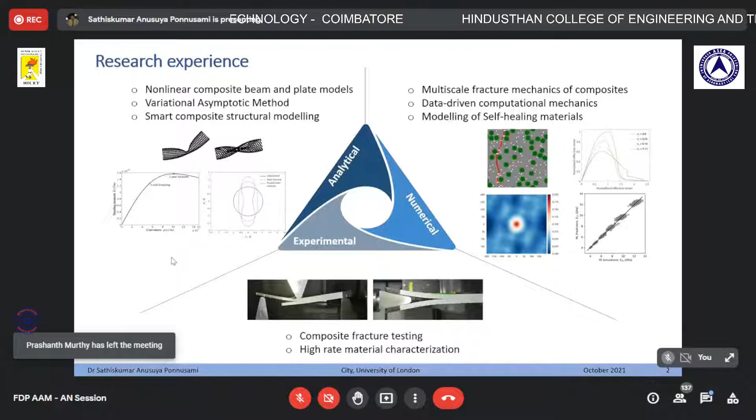So coming back to the topic, my research experience generally spans across three different areas: analytical methods for aerospace structures, computational techniques to analyze and design aerospace structures and materials, and also experimental investigations of advanced composites through experimental testing, especially under fracture and damage by impact loadings. I don't know why the date isn't changed—I changed it here, but it didn't change here. Please ignore that; this is also one of the presentations I gave earlier.

But let us go into the actual topic. Of course, you all very well know an airplane, and one of the core components of an airplane is the jet engine, isn't it?

As you can see schematically, the different components of a jet engine would start with the compressor, and then the usual components, including the combustion chamber, turbine, and the nozzle.

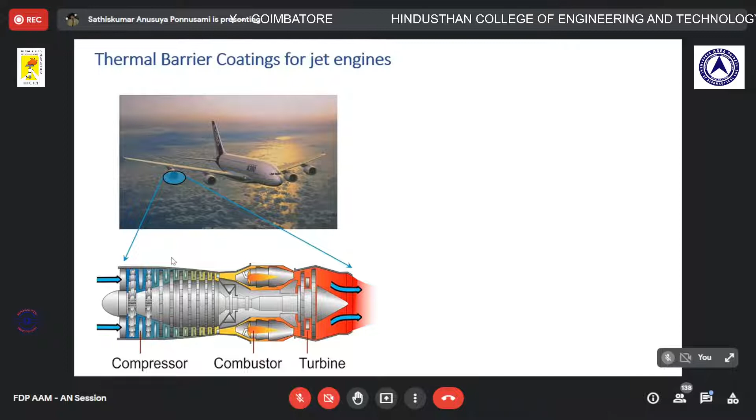So what we usually do is have these high-strength alloys, but on top of it, to withstand such very high temperatures, we basically coat these nickel blade alloys with ceramic coatings, and we call them thermal barrier coatings. As you can see here, this is your blade, a typical nickel alloy blade, and on top of it we have a coating, and the microstructural picture of the coating is what you see here.

As you can decipher from the top right image of the microstructure, you have different layers there. It's a single coating, but it's more of a hybrid coating. You have a blade underneath, that's the metallic blade, and on top of it you have the so-called bond coat, as you can see here if you can see my mouse pointer. The bond coat is a metallic layer again that is used to bond the underlying metallic blade to the ceramic coat on the top, and that ceramic coat is the top coat.

It can go up to... Okay, and why am I showing this picture is that this particular microstructure shows you a coating layer which is made of both metallic and ceramic constituents.

Imagine you have a metal and then a rubber layer bonded together, and you put it in the oven and heat it up. What happens? Because the two materials that are bonded together have different characteristics, one expanding more than the other, naturally what happens? You develop thermal stresses, isn't it? Because both of them are bonded together, but one of them tries to expand more than the other, so you naturally develop the so-called thermal stresses.

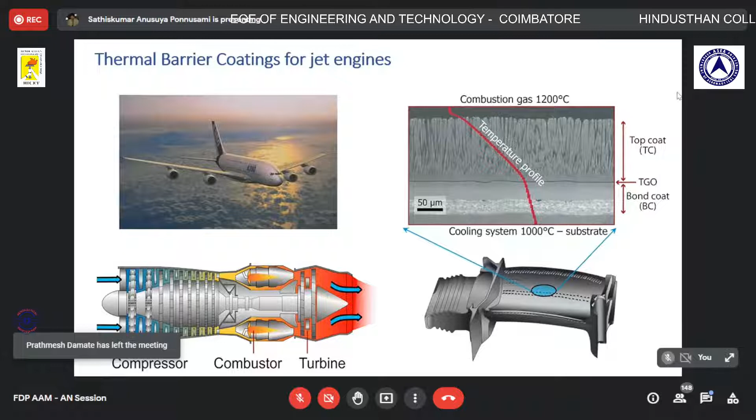And those thermal stresses during operation, meaning every takeoff and landing, those stresses create cracks, micro cracks. And that is what you would see in the next slide. So that is a schematic of the thermal barrier coating.

We call it TBC. And you see little micro cracks there, created due to the thermal stresses. During operation, you see a little black line in the middle. That little black line is basically called an oxide layer, which grows continuously during engine operation, meaning every takeoff and landing, the thickness of that particular black layer, the oxide layer, keeps growing.

But if it keeps growing, what happens? You are adding additional heterogeneity into the structure, which means the stresses would be more and more, which means the micro cracks would become more and more. But in the end, if you leave the micro cracks to form and grow, ultimately all these micro cracks coalesce and form a major crack, which leads to the entire failure of the coating. We call it spallation.

So the blade coatings... what the aeronautical industry do, mainly the MROs, whether it is the operators or the companies who make the engines, they replace the coatings. They take the engine out, clear the remaining bits and pieces of the coating, and then recoat it. And that process is extremely costly.

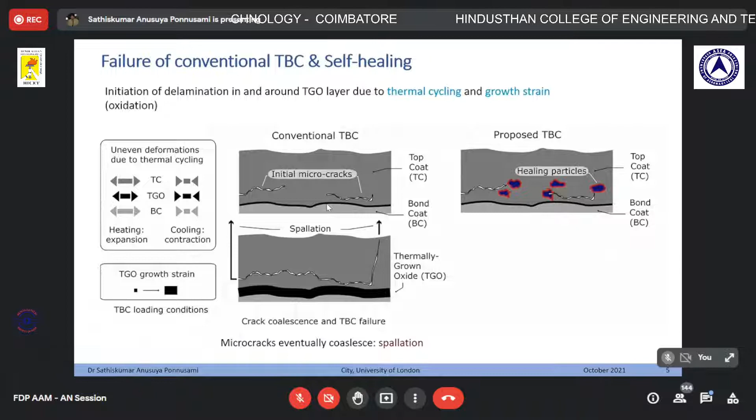These healing particles work when micro cracks happen, meaning when the flight is in operation and then when it lands, thermal stresses lead to cracks. When these cracks interact with the healing particles, the cracks open the particle, which contains a specific healing agent. That healing agent diffuses through the crack, and through further oxidation, it heals the crack, thereby regaining the structural integrity.

So what you are effectively doing is you see the blue-colored healed cracks. You are not allowing the micro cracks to coalesce, to join together to form a major crack, as you see on the left. The important point is you are not preventing any crack from forming, because that is unavoidable. Cracks do form, but we try to heal all those little micro cracks and prevent the formation of a major crack. By doing it, you basically enhance the lifetime.

Through our experimental testing with computational design, we were able to achieve a 30% increase in the lifetime of the thermal barrier coatings, and that is quite significant. 30% might seem a bit little, but it is quite significant for the aeronautical industry.

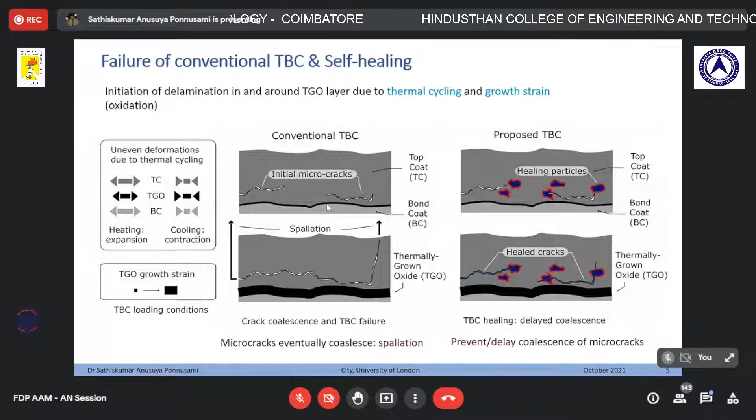Maintenance operations, or repair operations, are not only costly but also have downtime, engine downtime. You cannot fly without the engine, isn't it? So it all adds up to easily several hundreds of thousands of pounds or euros, depending on where you are, for each carrier. And if you add that to the entire world, you can calculate the amount of cost and time, human time, and downtime as well, for the aeronautical industry. So this structure or material is clearly multifunctional.

More than that, it heals itself. When the structure or material cracks, it heals itself and regains its original load carrying capability. That is the additional functionality that we add into this particular system, which is not there before, without adding more weight.

Natural questions would arise. Some of them would be: you are adding foreign particles into this existing structure, wouldn't it weaken the system? A natural question, because these particles look like foreign objects for this original system. Wouldn't it affect the original structural integrity? Yes, the answer is yes, it could be. But that is why we need to do the research, to see how effective it is and what cost effectiveness we achieve through this.

The other obvious question is: we have these nice healing particles, but when the crack forms, what if the crack goes away from the particle instead of being attracted towards it? That is also a beautiful difficulty, isn't it? Imagine the crack goes away from the particle instead of hitting the healing particle. Then the entire concept is a failure, isn't it?

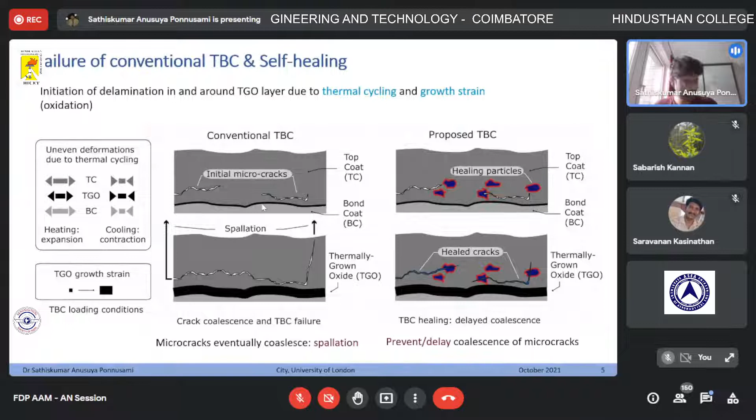So that is the whole crux of this particular concept. Of course, I do not want to dwell into the details of the research, but let me take you through some of the research results.

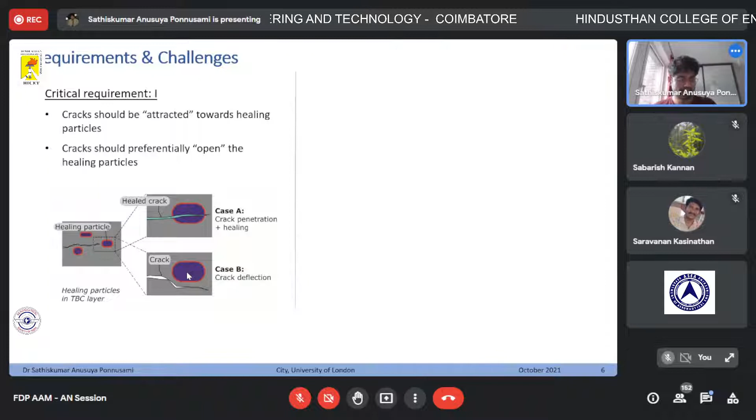As I talked about, the first challenge is, if you see case A and case B, you clearly see case A is what we need for the healing to work. Whereas case B is something we do not want, because the crack deflects, and in that case healing would not happen. But the interesting point here is, in traditional composites, traditional fiber composites or particulate composites that we typically use in aerospace, automotive, and wind energy industry, wind turbine blades, we actually would like to see case B happen. And why is that?

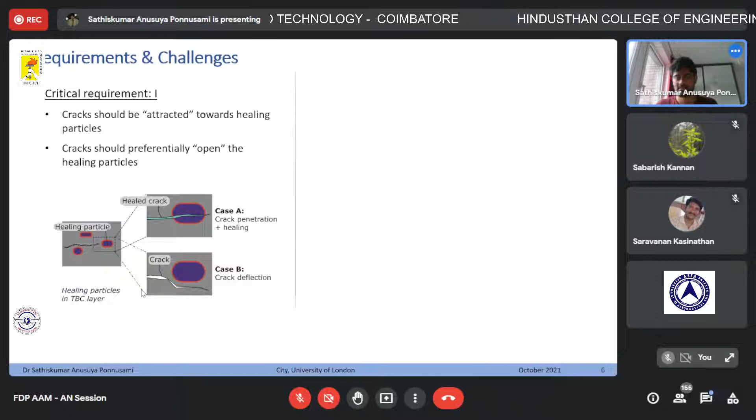I'm not sure if this session can be interactive, but in the context of composites, why is that so? Because crack deflection is one of the strengthening mechanisms, one of the toughening mechanisms for composite materials.

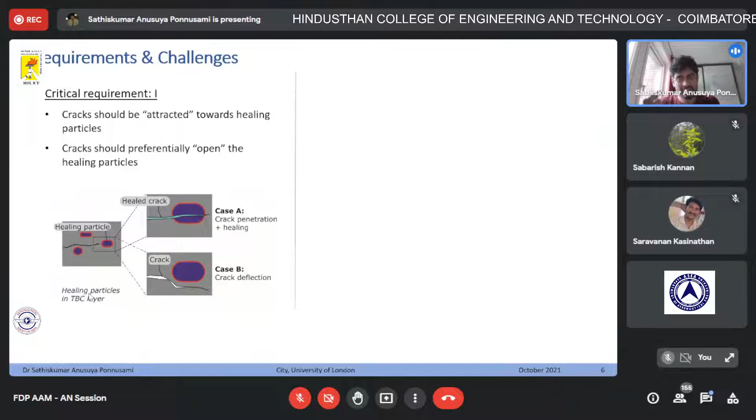But in this particular application, we do not want it. We do not want strengthening or toughening. We want the particles, the healing particles, to break. Because remember, the purpose of the healing particle is not to strengthen or toughen the original structure or material, but rather to introduce the healing functionality.

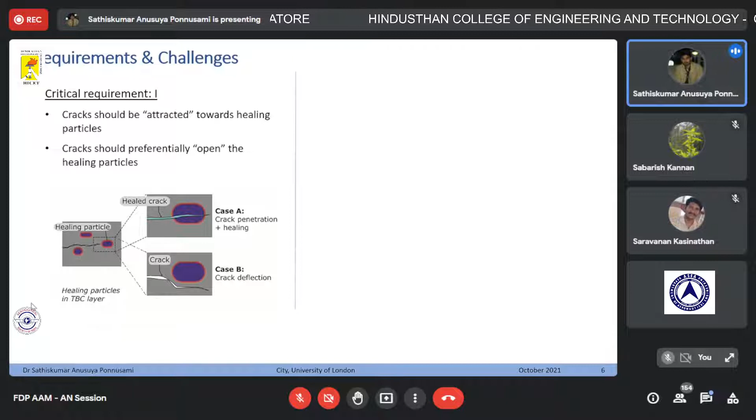So we make sure that case A happens, through a series of parametric studies, both experimental and numerical, to choose the right type of particle in terms of its properties.

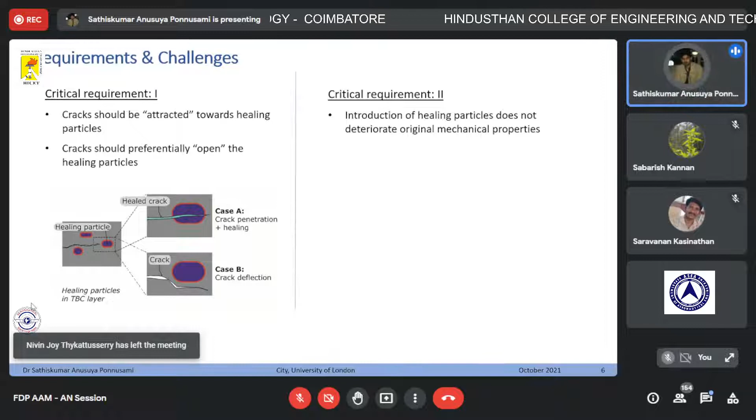The second requirement, as I already discussed, is that the introduction of healing particles should not deteriorate the original mechanical properties. It's an obvious requirement, because you introduce something new, and what if you lose the already existing properties? That's not advantageous. So that is another challenge.

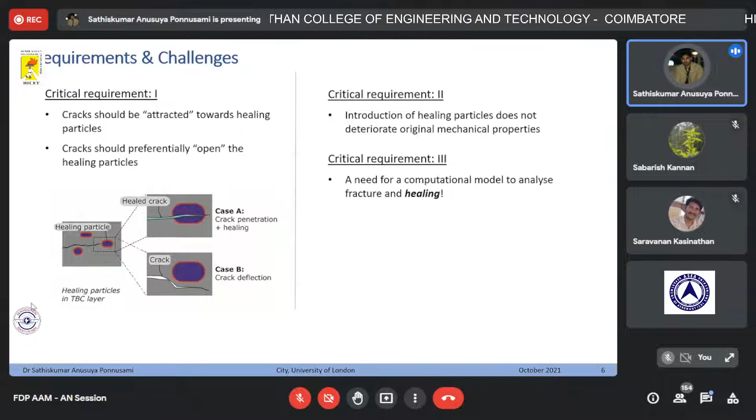And the third challenge is that once this particular proposal or idea is developed and matured, we need a computational model or tool to analyze these kinds of systems. Because as you all know, we have a range of tools to analyze fracture or damage in structures, but we do not have tools to analyze healing.

Healing is the reverse of damage, isn't it? Reverse of fracture. And for that, the physical models are not that much available, either in open source or commercial tools. So the research also encompasses developing computational tools to analyze these new mechanisms.

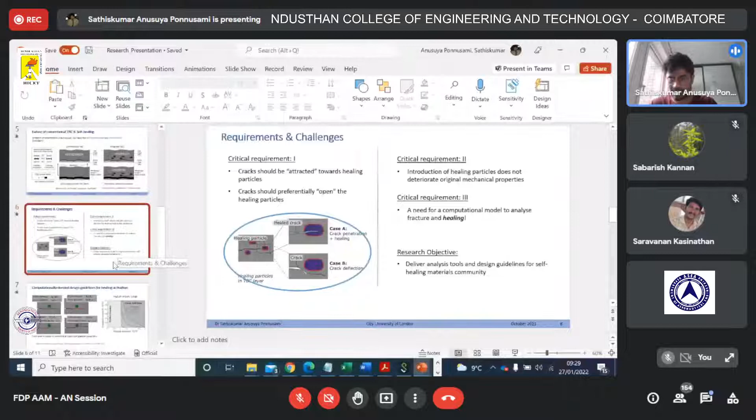Okay, so that is the part on multifunctional materials. For the first part, let me quickly move on without going into the details of the results, because I want to cover a few more topics. The second part of the multifunctional materials or composites is what I'm going to show in this particular animation.

During 2015-16, we participated in the Airbus competition, the Fly Your Ideas competition, and the concept actually won first prize. Of course, it's not only hard work but also luck, isn't it? We had more than 500 teams participating from more than 100 countries, and had to go through 3 different rounds before finally winning first place.

It's not just hard work, though hard work is of course needed. It's also about how you present things, how you communicate things. It all matters. It's not just the idea alone, but also how you package things. One part is doing excellent research, the other is how you disseminate that research, not only to the technical audience but also to the general audience. Both are equally important.

That is also the case in teaching. It's not about how good you are in technical knowledge, but also how good you communicate, isn't it? Research and teaching don't necessarily have to be the same. One person can be really good at research, and another can be really good at teaching. It's a unique skill we all need to develop as academics, to blend these two different skills together, so students can benefit.

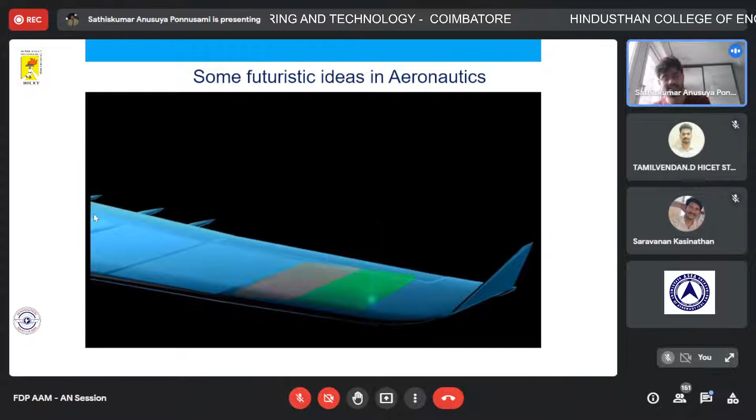In the end, when the wing vibrates, you harvest or recycle electrical energy from the vibrations and store it in the adjacent battery panel. So simultaneously, you're trying to achieve an aircraft wing that originally handled the loads but now also recycles and stores energy. So your aircraft wing is doing three different jobs, three different functions, and that is a true multifunctional structure.

Of course, if I wanted to give a presentation on just this project, that would take easily a couple of hours. But without getting into the details, what we tried to achieve is the design of a multifunctional wing and fuselage such that this structure does three different functions: load bearing, meaning the strength and stiffness of the existing structure is not compromised.

Then we made sure it harvests or recycles the maximum possible electrical energy from the vibrations. And the third one, we made sure it stores sufficient recycled energy into its structure. Thereby your structure is a battery as well — it's a harvester and a load bearer. And that is the beauty.

Why is this important? This concept is important especially for sustainable aviation, the future of aviation. All of you would know about Tesla, but all the companies are now making electric automotive cars, for obvious reasons, to enable greener and sustainable transportation, to reduce CO2 emissions so that climate change can be mitigated. That is the whole purpose.

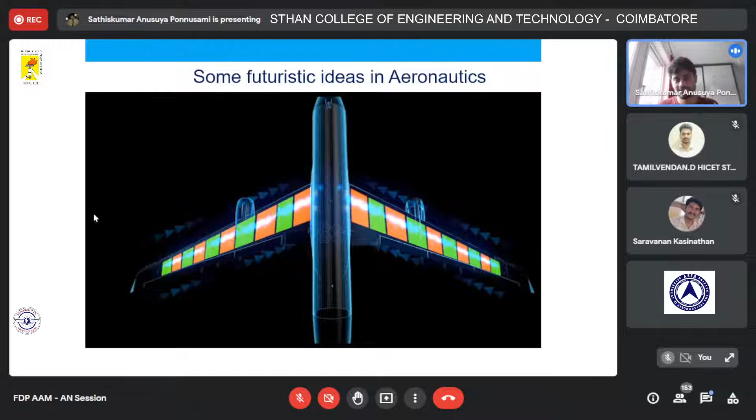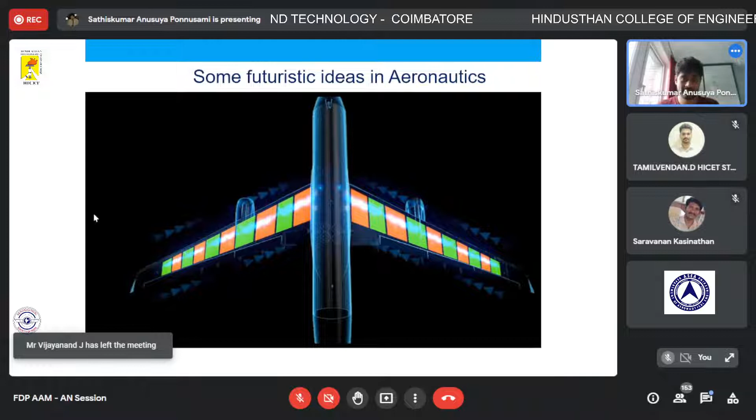So the only way possible is to have more battery capacity without adding weight and space. This particular concept would be the ideal solution, because now, if designed properly, you're converting your existing wing and fuselage structure into a battery, without adding weight and space. Wings and fuselage are anyway there, present - you can't fly without the fuselage and the wing, isn't it? So you're doubling, or rather tripling up the existing structure to carry more energy without adding weight and space.

That means you can possibly increase the range and endurance by 50%. We showed in this project that we could enhance or increase the range of electric planes by 50%, and that is quite significant. In other words, an airplane developed by Airbus that flies 1,000 miles or kilometers, with this concept, could go 1,500 miles or kilometers in one stretch. That is the advantage we're talking about, and it can only be driven by such futuristic ideas, one of which is multifunctional composites.

So as a conclusion of this first part of the talk, multifunctional composites do hold the key for future design of airplanes, and also helicopters and drones as well. Drones have a similar issue, especially electric drones - you have to recharge them, isn't it?

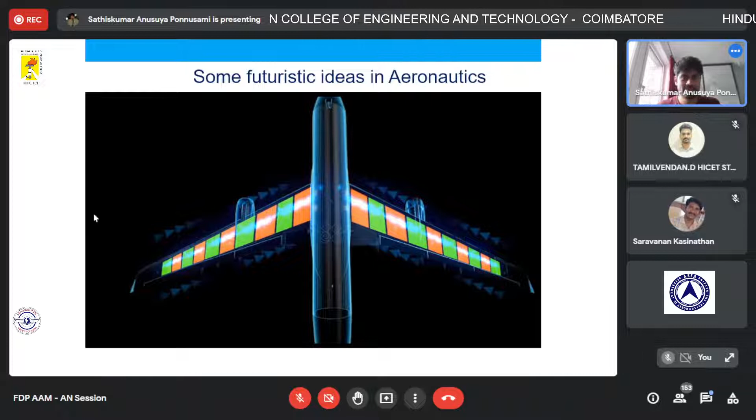Drones find many applications these days, including taking videos for wedding ceremonies, but many other uses too - surveillance, for example military surveillance, and much more than that, during floods, natural calamities, and so on. For all this, the difficulty is that you need to recharge them. But with these concepts, it's really easy to enhance the range and endurance of drones quite easily.

So the take-home message is that these concepts definitely hold the key for next generation design of airplanes. With that, I'll give 5 minutes - not really a break, but if you want to discuss anything, feel free to do that. I also take this opportunity to tell a couple of things.

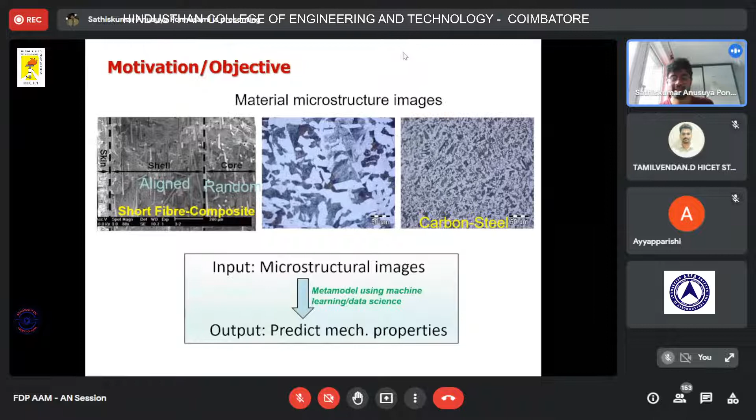Can we use machine learning or artificial intelligence to replace the testing, by just looking at the images of the material? Almost any lab has an optical microscope, if not a scanning electron microscope. You look into it, you take an image, you feed it to your AI algorithm, and then the AI can give the properties. That is the fundamental explorative idea of this particular research. The answer in short, yes, it is possible.

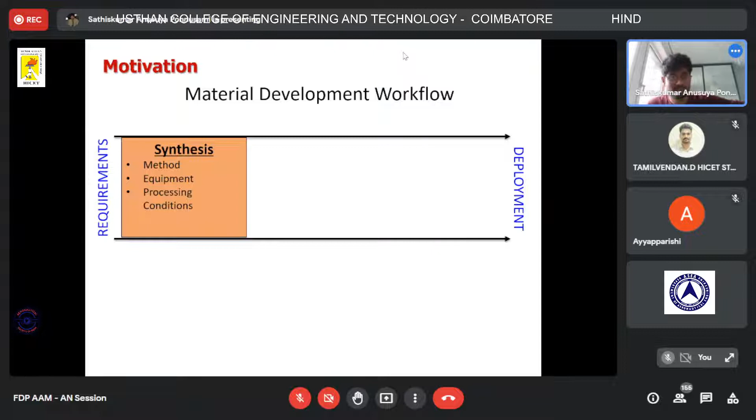What is the primary motive for this objective of getting properties directly from microstructural images? If you look at any typical material development workflow, it starts with the requirements, the end requirements of the structure with which the material is going to be made. So it starts with the synthesis. You choose the method of synthesis, the equipment that are needed, the processing conditions in terms of pressure, temperature, environmental conditions, and so on.

If you see that the property is not enough, if it doesn't satisfy the requirements, you go back to the process and repeat the cycle. You change your manufacturing method or your equipment, your processing condition, and then you arrive at a certain resulting material. You have the microstructure and you test it to see if you achieve the required properties. That is a time-consuming, iterative process.

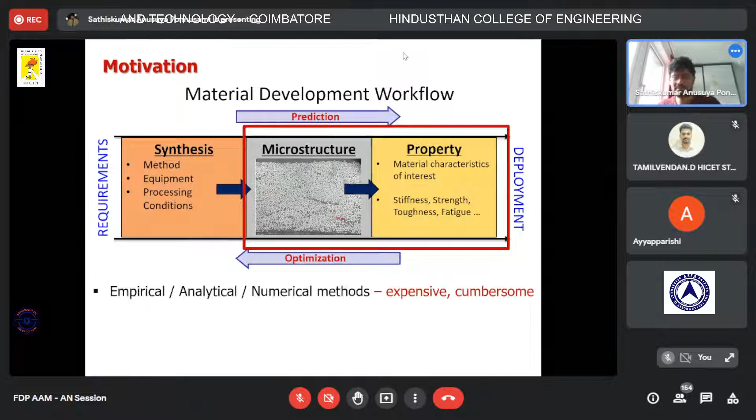That is why, as part of the optimization of material development, what we do is replace experiments typically using numerical methods, computational finite element analysis, to get the properties from the microstructure, which we call multi-scale homogenization. I'm sure many of you are aware of that term, but that is expensive. For doing this optimization process in order to accelerate material development, we need a reduced order strategy, and that is where data-driven machine learning technique comes in. That is the core part of this project.

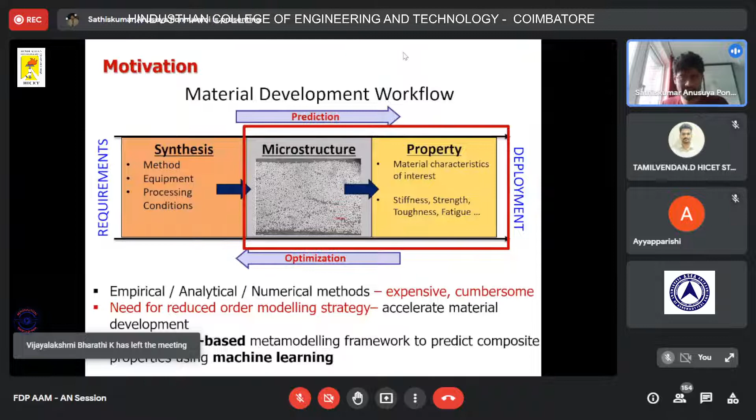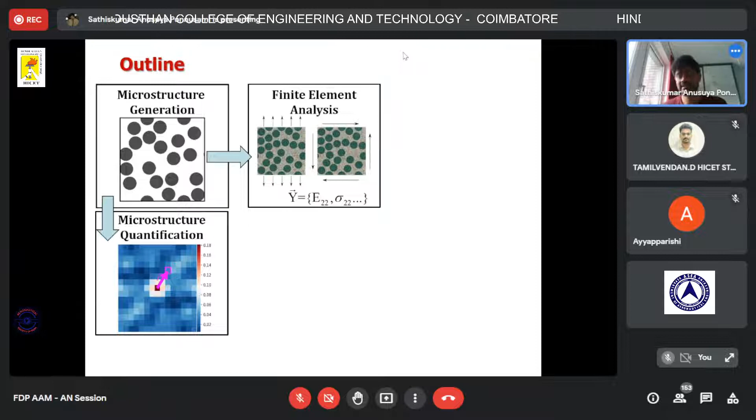The outline is here: we generate thousands of microstructures of composite materials, then we conduct finite element analysis using an automated batch to get all the properties of our interest. Once we have the properties and the images, we have the dataset ready. With this dataset, we train a machine learning algorithm to predict the properties by purely, or solely, looking at the microstructural images.

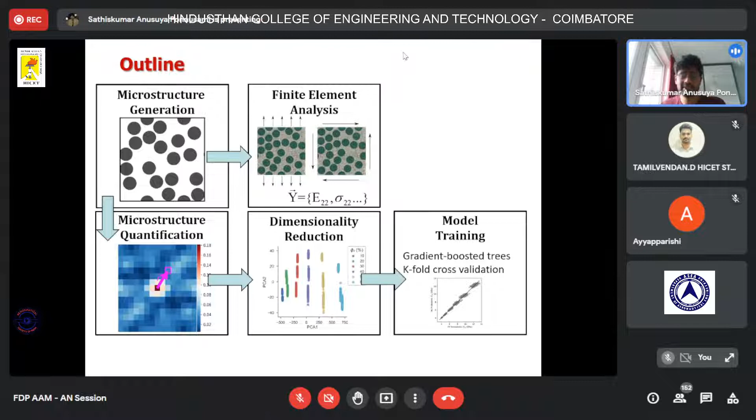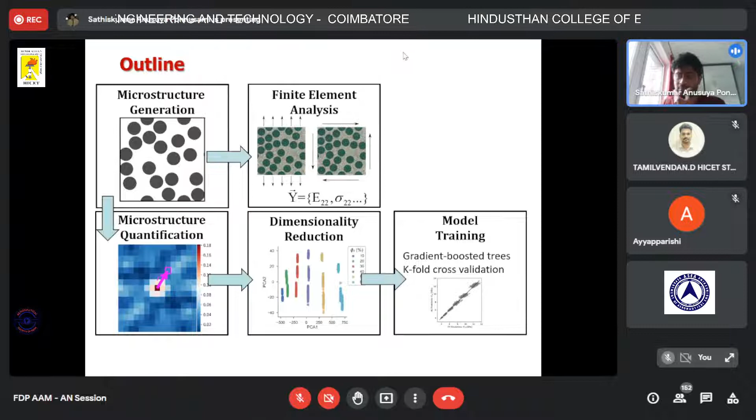But there are some intermediate steps. The first step is we quantify the microstructure, then we do some dimensionality reduction, which I'll talk a bit about in the presentation. Then we use the dimensionally reduced microstructural descriptors for training the machine learning model. In this research, we used a technique called gradient boosted tree regressor, one of the classical machine learning algorithms used in different applications. Then you validate the model, thereby completing the loop. Once you finish this, you have a machine learning model that gives you the properties by just looking at the microstructural image, and that is it.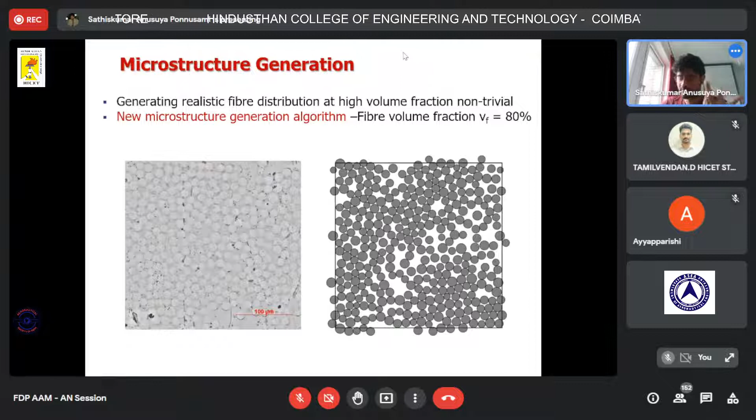Going in detail about the microstructure generation, or each step in this process: on the left you have an actual microstructure of a composite, on the right you have the microstructure we generated using our own code. Because to develop this tool, you cannot manufacture all the materials, isn't it? You need to manufacture 1,000 different microstructures, you cannot really manufacture it. That defeats the purpose.

So what we do is take a virtual approach in which we generate the microstructure synthetically using computers, but we make sure we mimic all the relevant microstructural features from the actual material. From these two pictures, you may not realize that the right is very similar to the left. For that, you need to do a couple of analyses, shown in these two pictures. Without spending too much time on this, you see two different parameters which characterize the microstructure. One is the first neighbor distance, meaning if you take one fiber, where the next fiber is located - that is one of the microstructural descriptors. The second is the orientation of the nearest fiber. We do this analysis for both the real microstructure and our own synthetically generated microstructure.

You see the red line is the experimental one, and the black line, the black nice varying line here is the current one, the algorithm that we generated. They match reasonably well, both the left and the right, which means you actually capture the experimental or the real features of the material, and that is good enough to start with.

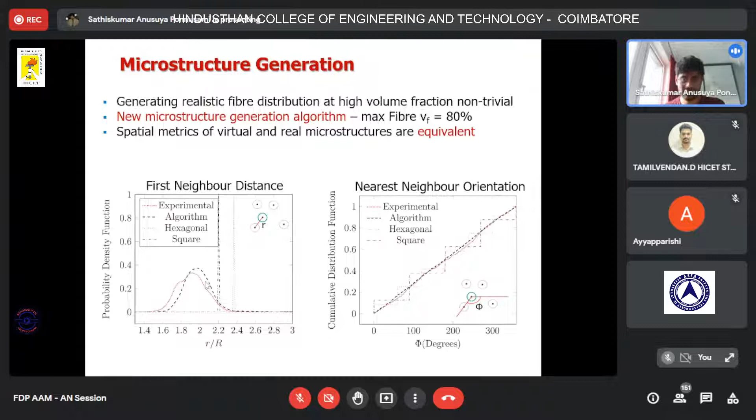So once you have a validated algorithm that is able to produce nice realistic images, you move on to the next step. We can generate any microstructure of any shape, any size, any volume fraction, as you can see in this particular slide. Not only in 2D, but also all 3D microstructures in which you only see the particles, of any size or shape, volume fraction.

It can also be fibers. You do not see the matrix because then the particles would be invisible if I show the matrix here. But what you can see is that you see RVEs, which are 3D. RVE meaning representative volume element.

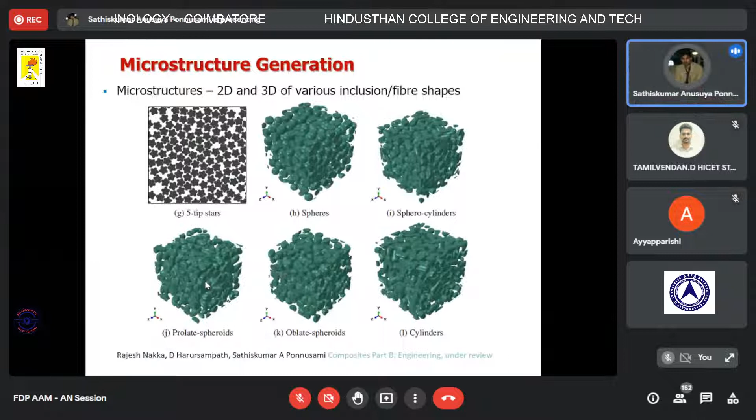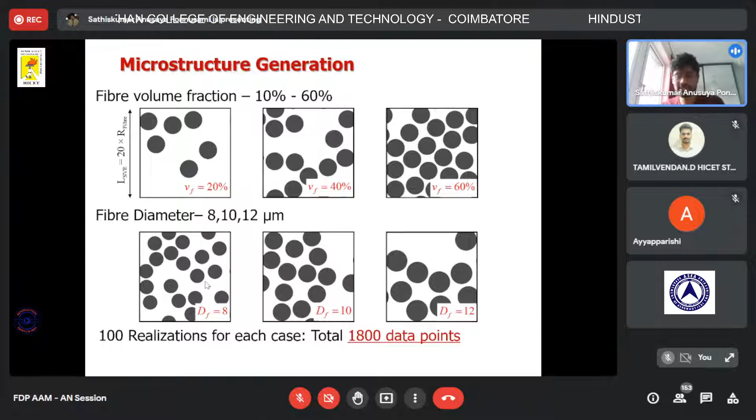So with this, we proceed to collect thousands of microstructures. We conduct finite element analysis and get the properties. Some of the samples are what you see, the capability of the microstructure generation, and these are some data points here. For the first study, we took 1,800 data points, but for now we have more than 10 to 15,000, around 15,000 microstructures together with the properties.

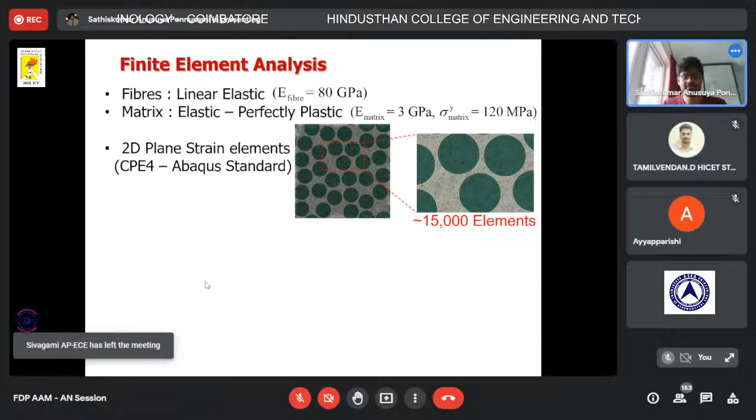All these microstructural images we feed to finite element analysis, which is an automated framework that we have. We have certain assumptions on the material properties. Obviously fibers are linear elastic, we assume, and we take the properties of a glass fiber for now. The matrix we assume to be elastic perfectly plastic, and we do 2D analysis for this particular research, but of course we extend this for 3D as well in the current work being done.

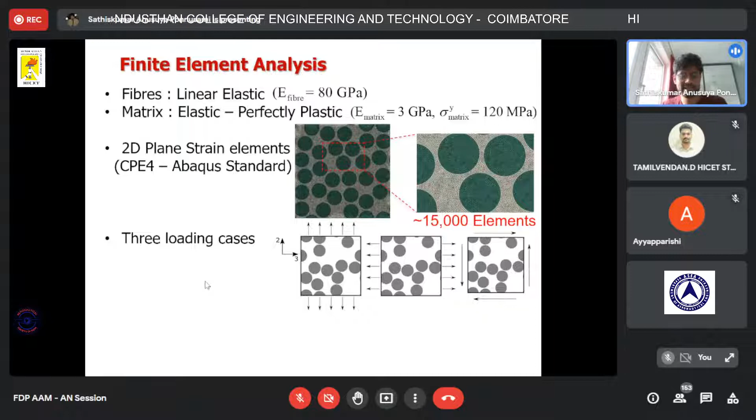Then we look at different loading cases possible: tension, compression, and also shear in different directions. We extract the properties, that is Young's modulus in 2 directions and 3 directions, shear modulus, yield strength in 2 directions, and yield strength in 3 directions. For this pilot exercise, we consider these 5 properties as the properties of the material: Young's modulus, shear modulus, and yield strength. So those are the outputs you seek, and the input is the microstructural image.

So now what you have is the data set. If I say data set, it basically means the input-output combination. In this problem, the input are the thousands of microstructural images, the output is all these properties. Now what do we do with this? We choose and design a machine learning model that can be trained on this data set, meaning it should learn how the microstructural features are influencing the properties. That is the purpose of a machine learning model, to learn these correlations between the features and the properties.

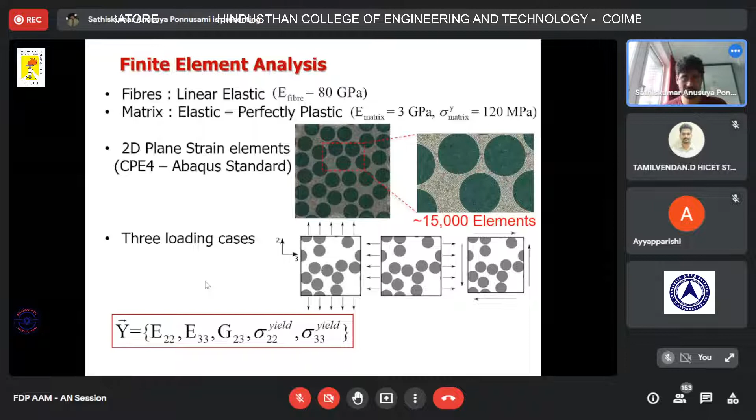Before that, there are 2 different machine learning tools that we developed. One is based on classical machine learning, which works on a data set that has to do with numbers, meaning the inputs have to be numbers and the outputs have to be numbers. It doesn't work with images. So for that we do a little pre-processing, you can call it data processing or image processing, in which we use the so-called two-point correlation function.

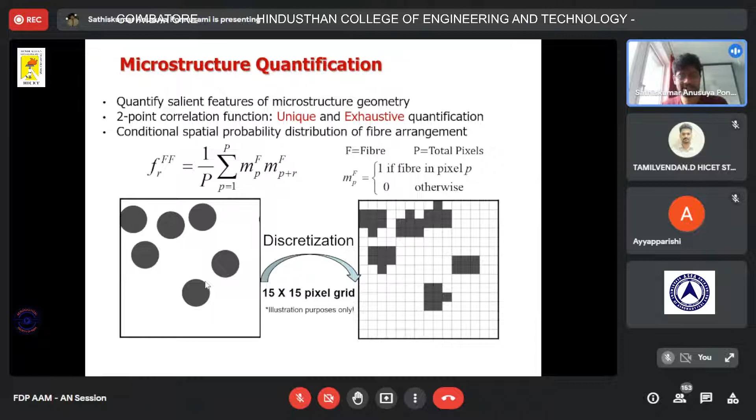You take a microstructure and discretize it, and then you calculate the two-point correlation function, which is essentially characterizing the microstructure. Once you discretize it, you take a little vector of size r of different sizes from one point to the other, in which you change the magnitude as well as orientation, and then you characterize the microstructure. In the end you get a pixelated image that you see on the right, which is basically a set of numbers, a spatially located matrix, and the highest value is actually the volume fraction of the particles. If I go to the next slide it will be even clearer.

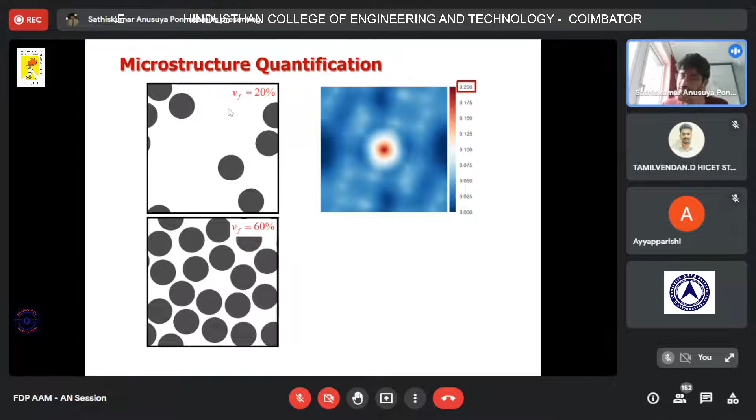So this is the microstructure on the left. The right is the two-point correlation function plotted. The peak value is 0.2, that is nothing but 20%, and 20% is basically the volume fraction you see on the left. And another example, which is for higher volume fraction, that is 60%.

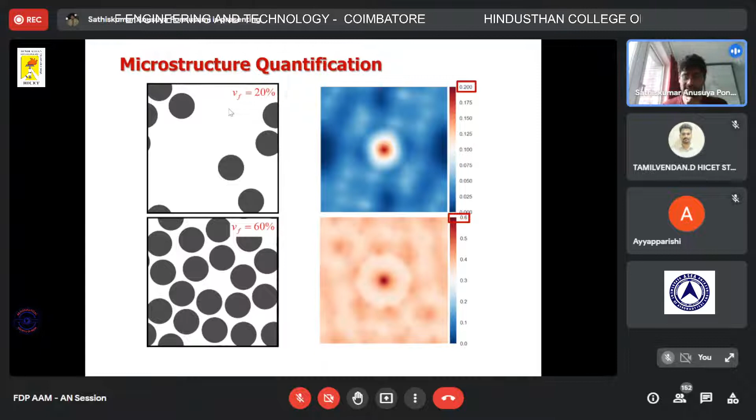The two-point correlation function is basically what you see on the bottom right. Again, the peak value is the volume fraction, that is 60%. But what is important to remember here is that this two-point correlation function basically represents your microstructure.

And why are we doing it? Because the machine learning algorithm cannot read the image directly. The machine learning algorithm we currently choose works with numbers, it's a regression algorithm. So these two right images are a bunch of numbers expressed in a matrix form, and that is quite confusing for the machine learning model, isn't it?

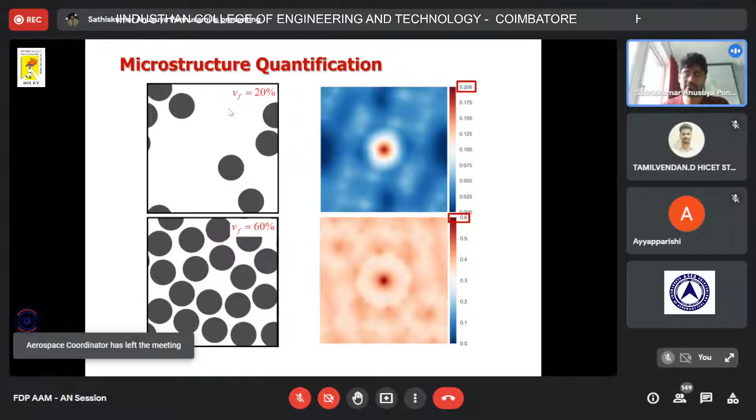So for that, we do one more step, called dimensionality reduction, using principal component analysis. To give a quick understanding, you might have studied eigenvalue problems. If you have a matrix of size 10 by 10, fully populated, you can convert it to a different coordinate system whereby your matrix would be a pure diagonal matrix with eigenvalues on the diagonal and the rest of the off-diagonal elements being 0. They still represent the original system, isn't it? So it's the same thing.

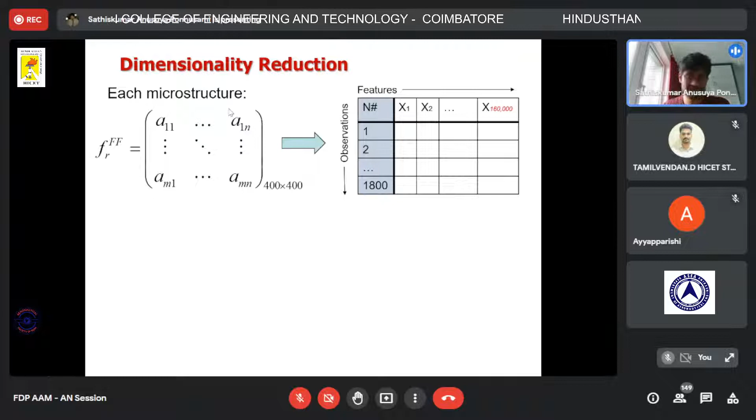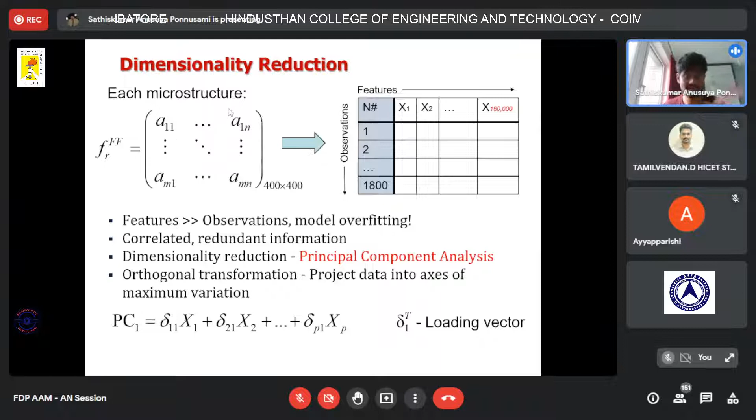So here, instead of having a matrix of size 400 by 400, meaning we divide each image into 400 by 400 pixels, which means the size of the image would be 160,000, that is your number of input variables for the machine learning model, which is quite complicated for one image. So we use dimensionality reduction via principal component analysis, and we obtain a set of reduced numbers that represent the actual image. That is what principal component analysis is.

For example, the first principal component tracks the fiber volume fraction. The second might track the fiber diameter. The third might track the fiber distribution, or the spacing between the fibers, and so on. And if you go to higher and higher order, the meaning may not be obvious, but it still characterizes some of the microstructural features.

It's similar to vibration analysis. The first fundamental frequency is the dominant one, isn't it? Then you have many modes: bending modes, torsional modes, extensional modes, and so on. But for a beam or a plate, ideally or theoretically you have an infinite number of degrees of freedom, meaning infinite fundamental natural frequencies. But you do not take them all for your design, isn't it? You may take up to the first 10 frequencies. But if you want to know the meaning of the 20th or 30th frequency, it may not be as obvious, but it still has some of the details of your structure.

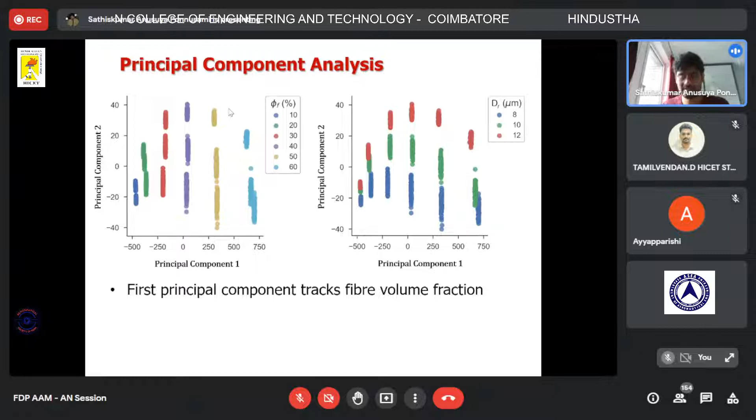Same thing applies here. The first frequencies would be more dominant in defining the microstructure, but the later principal components may not be as important. But we still take the first 200 principal components for the machine learning training.

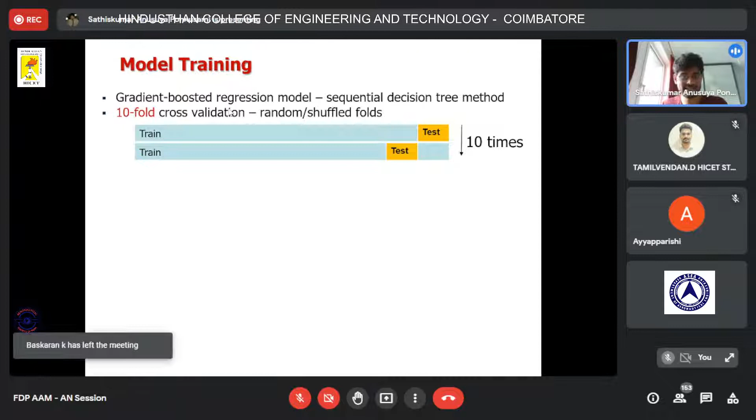And then we go to the actual machine learning model, which is a gradient boosted regression model. We use so-called tenfold cross-validation, which is a way to generalize your model and test its accuracy in terms of generalizing it. And after a set of hyperparameter tuning, meaning optimizing your machine learning model for better learning, you have the results here. Once your model is trained, you have the results, as you can see at the bottom.

What you have to understand here is that the x-axis is the actual values of the property derived from finite element simulation, or it can come from experiments. On the y-axis, you have the predictions from the machine learning model. If the accuracy is 100%, all the predictions should lie along the 45-degree line. As you can see, all of them are aligned very close to the 45-degree line, which means the accuracy is quite impressive.

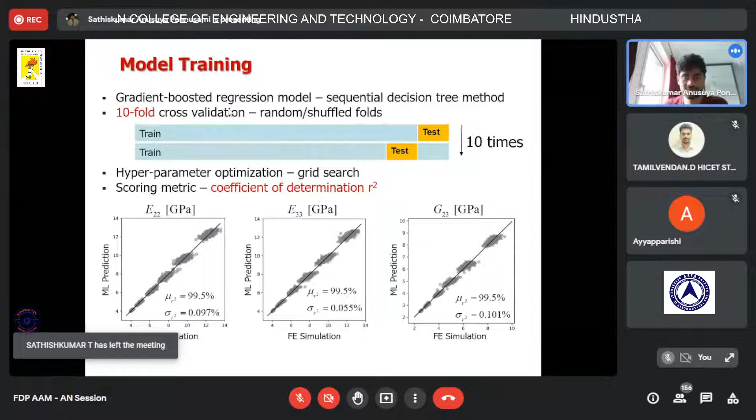This is for these elastic properties, the Young's modulus and the shear modulus. Of course, we have the yield strength as well, which is quite nonlinear, isn't it? Yield strength has to do with failure. You can see even there, though the property is nonlinear, meaning the correlation is nonlinear, the machine learning model is able to capture the properties really well.

So we got excellent predictions. The accuracy is not 100%, but that is not the purpose, isn't it? Even if we get 90 to 95% accuracy, that is really good enough. But the main takeaway here is the computational effort.

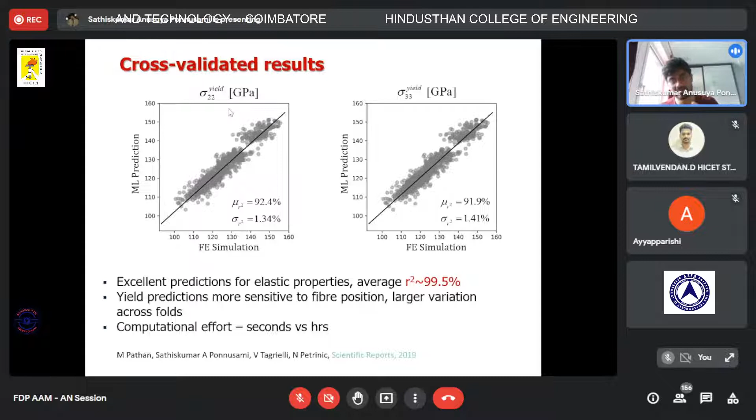To get all these properties, we need to conduct finite element analysis, nonlinear, in a multi-scale framework, that would take a couple of hours easily. And if you want to do experiments, I don't have to tell you - you need to manufacture the material, test it, and get the properties. So we are talking about seconds if you use a machine learning model, in which you just feed them an image, and the model gives the properties.

This research has been published in Nature Scientific Reports a couple of years back, and for obvious reasons, this was rated as top 100 throughout the materials engineering domain for that particular year, 2019-20.

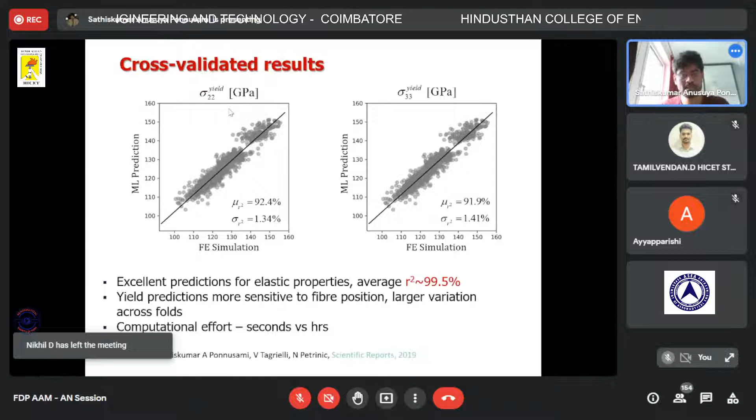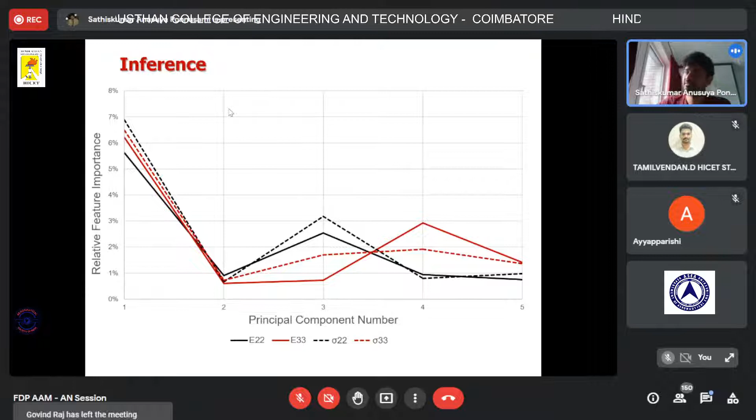The other thing which is really important is, of course, you can train and develop a machine learning model on anything, literally, isn't it? That's quite easy, because you have several open source literature and codes available - you can always do it. But as an engineer, as a researcher, as an academic, what you really need to know, what you need to be aware of, is what additional contribution you make to the scientific community - that is what is important.

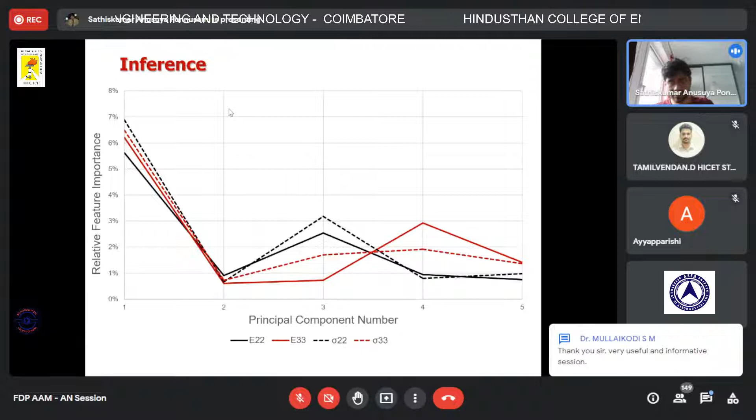So one of them is basically this inference, what you get out of it. Here, what we do is we not only train the models and predict the properties, which is of course useful, but we also understand how the machine learning model works. What is it really doing? How is it learning? How is it correlating between the microstructural features and the properties?

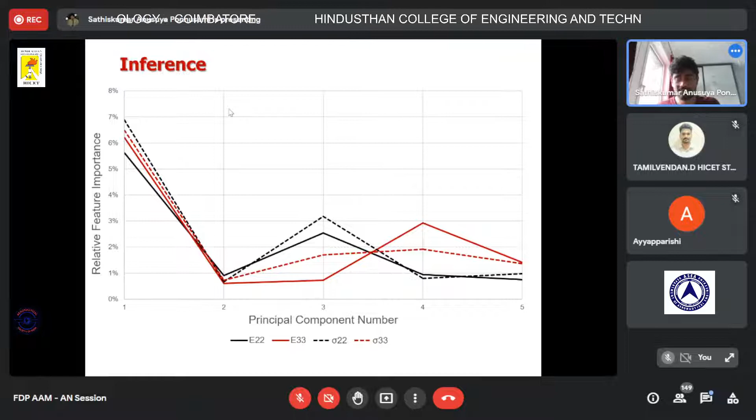So that is this little study in which you see the different principal components and how they are influencing the predictions of the machine learning model. As you can obviously see, the first principal component is the major contributor to the predictions, but further principal components do contribute too. Interestingly, the first principal component is actually the volume fraction, which definitely dominates the predictions, no doubt about it.

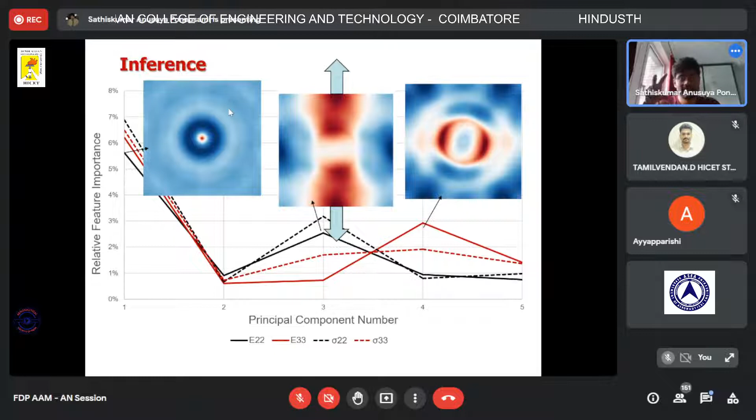That's the first order effect - how many fibers do you have in the composite. But then you see the third and the fourth principal component somehow tries to understand how the fibers are oriented. I've plotted the third and the fourth principal component, and they peak - not the maximum peak, but they have their own local peaks. So they have influence, telling the machine learning algorithm, or in other words, the machine learning algorithm learns how the fibers are oriented.

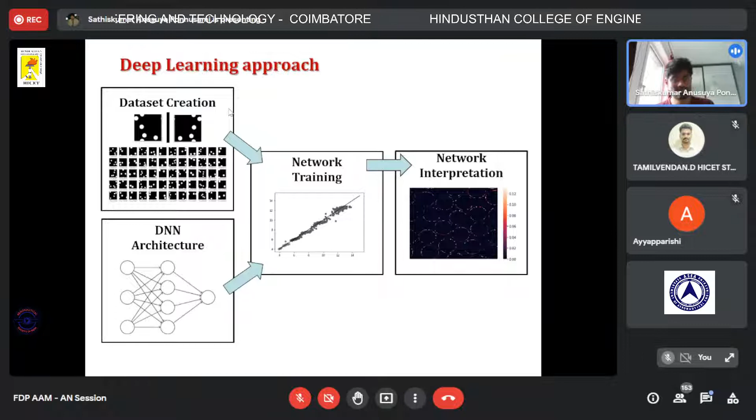Now the second research that is currently under review - instead of using a classical machine learning algorithm, we want to eliminate the need for the pre-processing of the image. What we need to do is provide the image directly as input. I'll finish in a couple of minutes.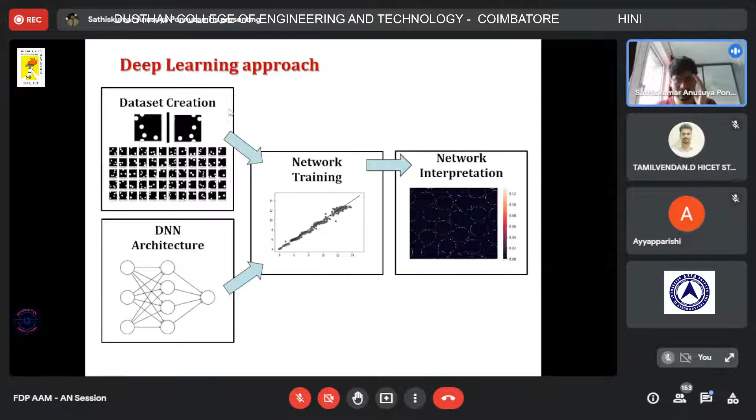We want to directly feed the image into the network, into the deep learning tool, and then get the properties directly as outputs. That is what we did here, in which we don't have to do the 2-point correlation function or the principal component analysis. Your deep learning tool or algorithm directly takes in images and spits out the properties.

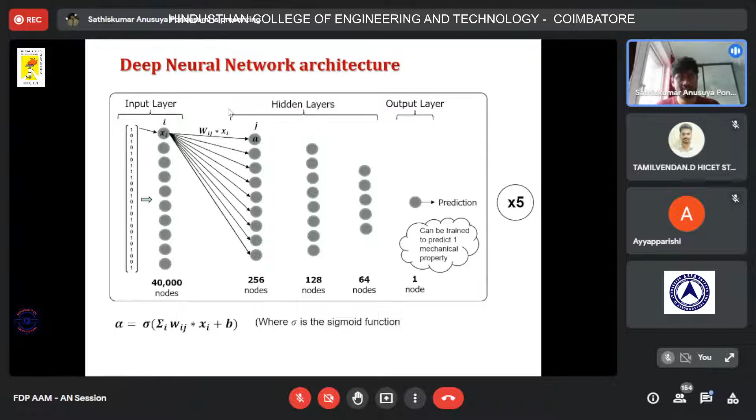Without going into detail, it's basically the fully connected neural network that we used, but we also used a convolutional neural network too. And here are the predictions.

Neural networks are shown to be predicting better than the machine learning algorithm that we developed earlier, because the accuracy was about 98 to 99%, both for the elastic properties, but also in the next slide you will see the CNN, the bottom picture, the bottom result obtained from the convolutional neural network.

They predict really well the properties. The accuracy is easily close to 99%. Whereas the top model, that is the fully connected network, the accuracy is not as good because it's a fully connected network, meaning the learning is not as effective as the convolutional neural network.

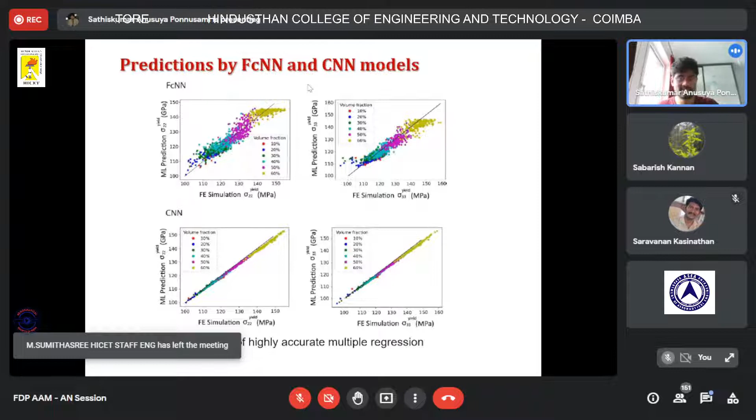Especially for the nonlinear property, which is the yield strength. So I'll spend a minute or two on this particular one, which is interpretability.

Why is this important? Because, as I said before, anyone can develop a machine learning model if you have nice data. What is really important as an academic, as a researcher, is that you need to understand what is really going on in the black box, because any AI, machine learning, deep learning is always considered to be a black box, isn't it?

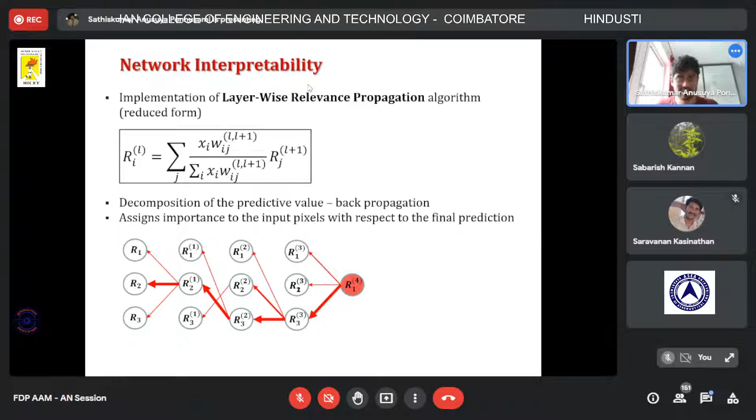Because effectively a machine learning model is an intelligent curve fit. It's an intelligent interpolation function, but in a multidimensional space, which is not that trivial if you use any other classical interpolation or curve fit technique.

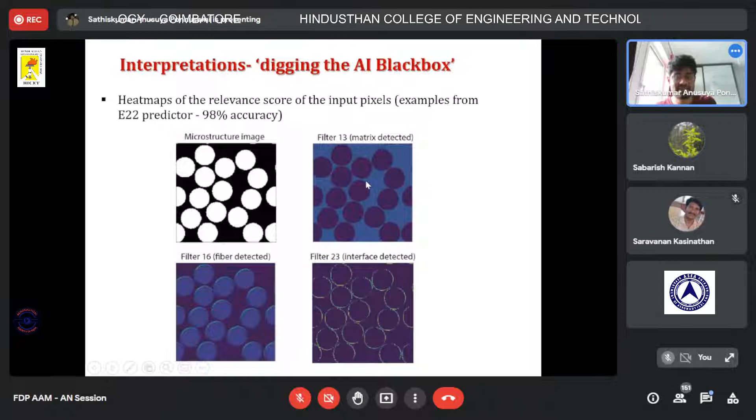So the machine learning model, or here the deep learning model, a subset of machine learning, is able to extract the important features. For example, the top left is the actual image. The top right is where the machine learning model itself detects the matrix phase. The bottom left detects the fiber phase. The bottom right detects the interface.

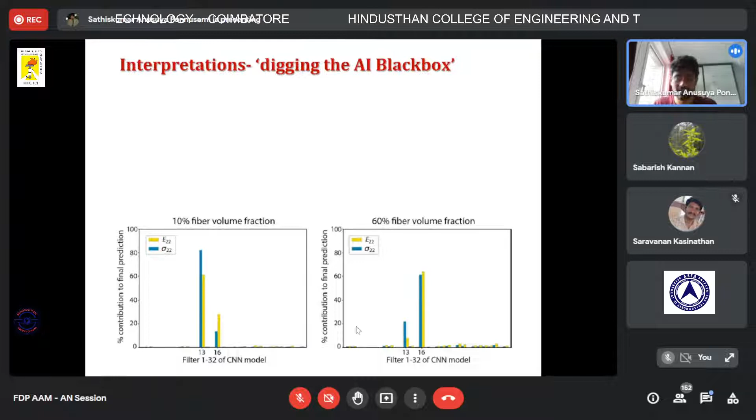We managed to get nice physics out of it, meaning we derived physics from the unphysical AI black box, and that is quite impressive, which is not usually done. We actually managed to derive physical models for predicting the properties from AI, and that is what you see here. This little work is under review currently.

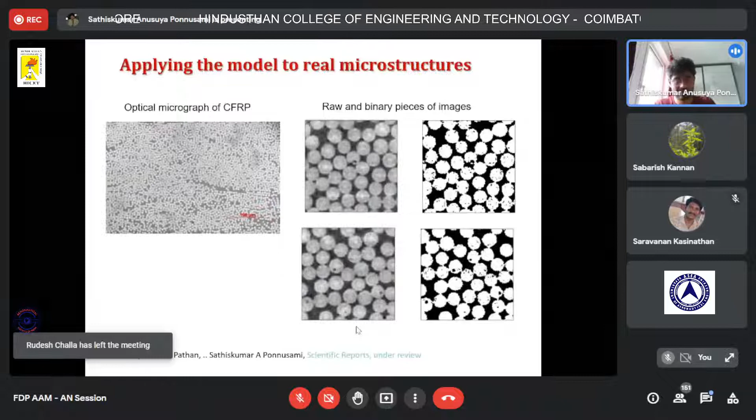We also showcase the applicability of this tool that we developed for real images. So far we did virtual testing, but now what you see is the actual micrograph, real material. We took different chunks of these materials, fed the real images into the model that we developed, and as you can see, the prediction is really good because the accuracy is easily 95%.

In other words, one of the properties, Young's modulus, the experimental non-dimensionalized value is 3.63, whereas the predicted value is 3.87 to 3.89, which is quite impressive because the clarity of the experimental image is really bad. But even then, your AI tool is able to learn and predict the properties reasonably well, and that is a success really.

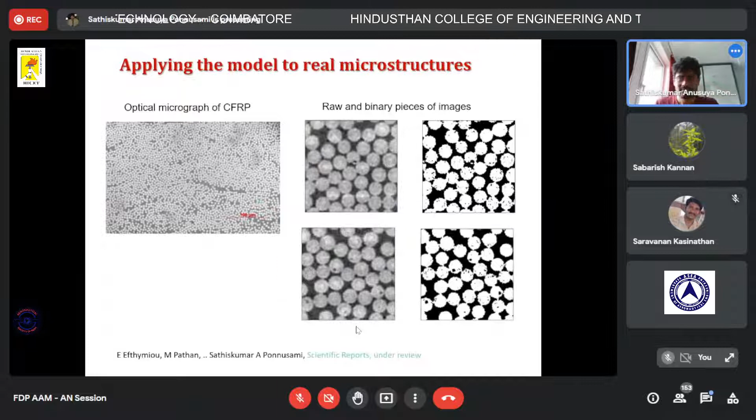So what I'm trying to say is that machine learning tools do have the capability, the scope to offer, within the context of aerospace structures and materials design, if used appropriately and effectively.

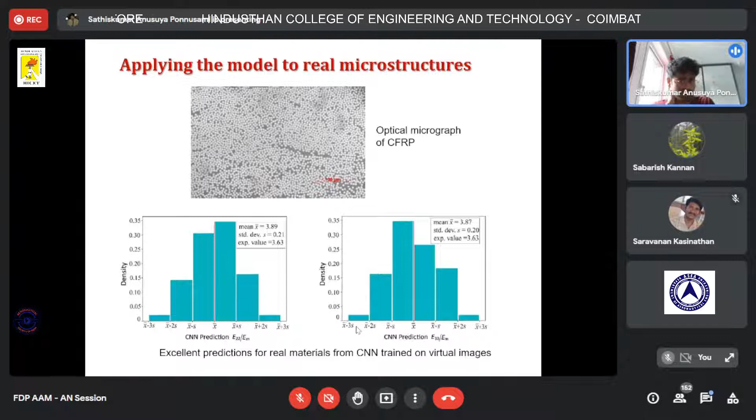In my research group, we use AI for different techniques. One of my PhD students is sponsored by IMechE, which is the equivalent of the Royal Aeronautical Society for Mechanical Engineering, as IMechE has an aerospace division. We develop machine learning tools for health monitoring in aerospace structures.

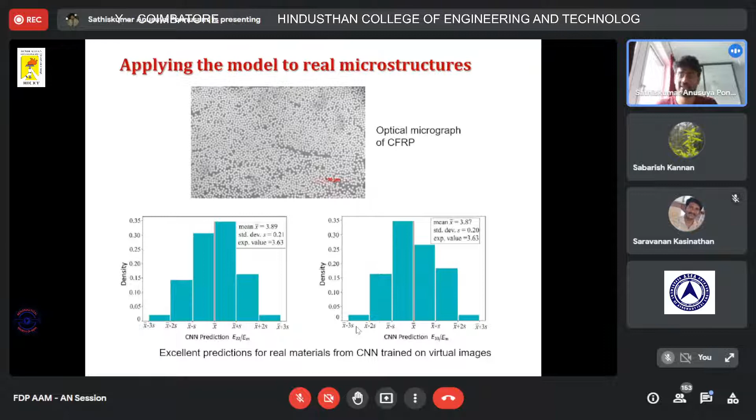Another PhD student is working on developing material models, constitutive models, using machine learning. Thereby, you reduce the computational time for simulations by a factor of 10, especially for complex simulations, which is quite important for the aerospace industry.

With my experience working with Rolls-Royce, typically a full blade simulation, an engine fan blade simulation, even takes about a month to complete. Imagine if we offer a computational time reduction by a factor of 10 - then instead of 30 days, you are doing your simulation in 3 days.

And that is the power of AI that we are talking about. With that, I conclude my talk on this, and I open the floor to questions if that is allowed. Thank you.